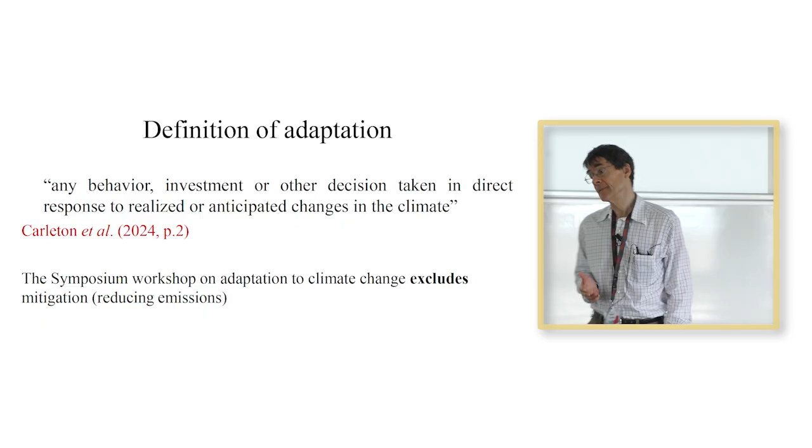Just before the conference, there was a symposium in Zinal, which went on for two and a half days. And my presentation is essentially a shortened version of what I presented in Zinal. And I'll begin by defining adaptation, because during our discussions, we found sort of conflicting definitions, and I want to focus quite sharply on one dimension here.

So here's one of several definitions that comes from a recent and a very good paper. Any behavior, investment, or other decision taken in direct response to realized or anticipated changes in the climate. All right, so it's forward-looking in the sense you look out perhaps to the end of this century, estimate what's going to happen in terms of temperature, precipitation, and so on.

But what the symposium workshop did was to rule out mitigation, right? Because some definitions include that. So unlike Moise, I'm not going to say anything about increases in greenhouse gas emissions, although that, of course, is a strong motivation for adapting.

All right, so what I'll do is to summarize the conclusions or what was identified as important ideas during the symposium. And I hope I'm not cannibalizing what was done.

Steph is no longer here to shut me up.

So 3 or 4 of these lessons come through in the presentation, but there's some additional considerations which the symposium participants saw to be important. The first is that unlike climate change, which is a global externality, the actual effects are highly heterogeneous. So even 2 locations separated by a few kilometers can experience quite different precipitation, particularly if you're on the windward side of the mountain versus the leeward side, for example.

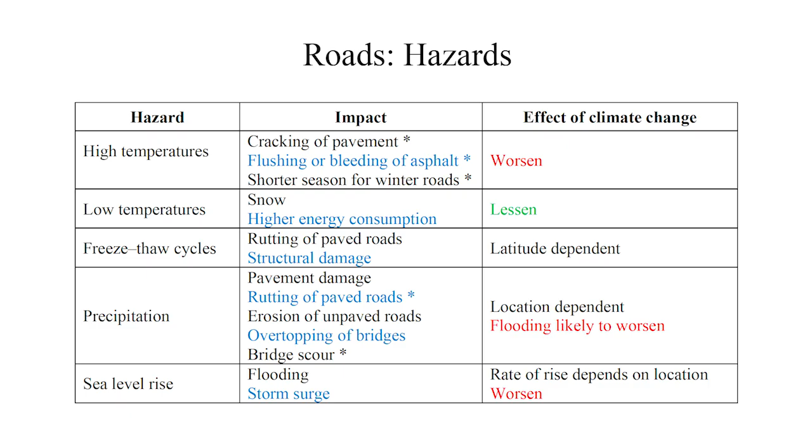They're identified in the left-hand column: high temperatures, also low temperatures in northern climates, freeze-thaw cycle, where the temperature rises above freezing but then below, and that causes expansion and contraction of the road. It can cause it to break apart, right? So it doesn't last as long as intended. Precipitation, and then sea level rise. And what I've done there is to identify the ways in which the problems are materialized, and the black-blue alternation is just so you can read that middle column a little bit easier.

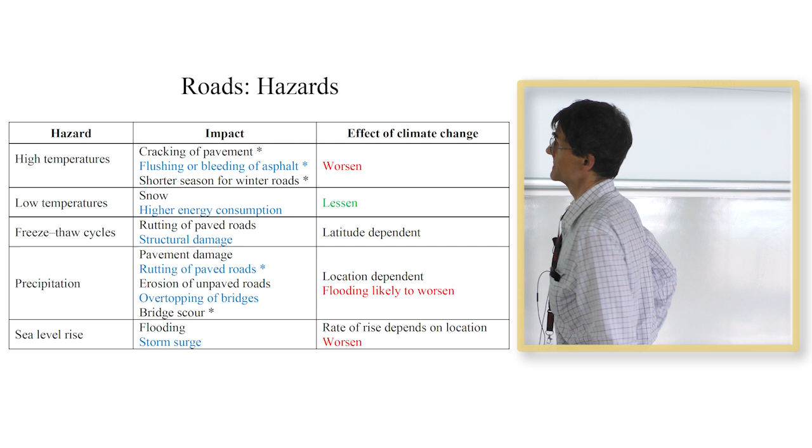And then, with climate change, are these particular problems going to get worse or better? Well, in the case of high temperatures, for the most part, they're going to get worse because it's global warming, although there can be instances where you have cold spells. Low temperatures, probably not so bad. Freeze-thaw cycles, it all depends on latitude. It depends on whether you're going to a climate where it's almost always cold, below freezing, so you're not going to get the freeze-thaw cycle, or whether it's intermediate or whether it's already pretty warm.

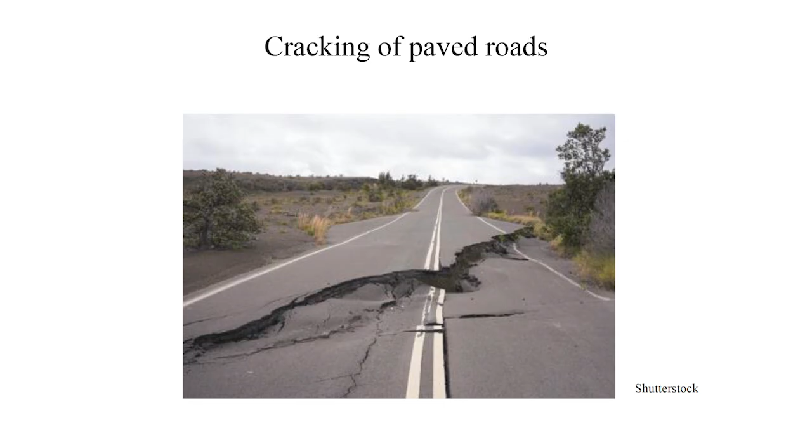Precipitation, it depends very much on where you are, but extreme rainfall is likely to become more frequent, even if the annual amount of precipitation doesn't. So that'll probably get worse. And then sea level rise, that'll get worse, although the amount will vary according to where you are, what coastline and what continent. So here's an example of cracking in a paved road.

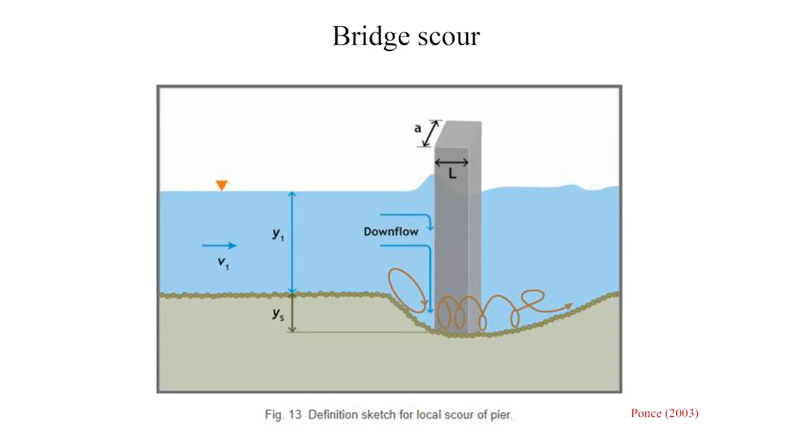Bridge scour. In this diagram, we have the river or the stream going from left to right. And when it reaches a pier of a bridge, you get turbulence, right? So it can speed up, and you get what's called scour. And that means the embankment, whether it's sand or soil or mud or whatever, gets eaten away. And that means that the foundations of the piers, which are supporting the bridge, get undermined.

And that's a problem. Now, rail is particularly complicated because there are many things which can be harmed by extreme weather and climate change. 11 components of the infrastructure in the left-hand column. Then you have the mobile plant, the trains which are driving on the track. The staff, the people who run the trains, the people who repair. And if it's very hot or very cold, the work may be dangerous and it has to be suspended.

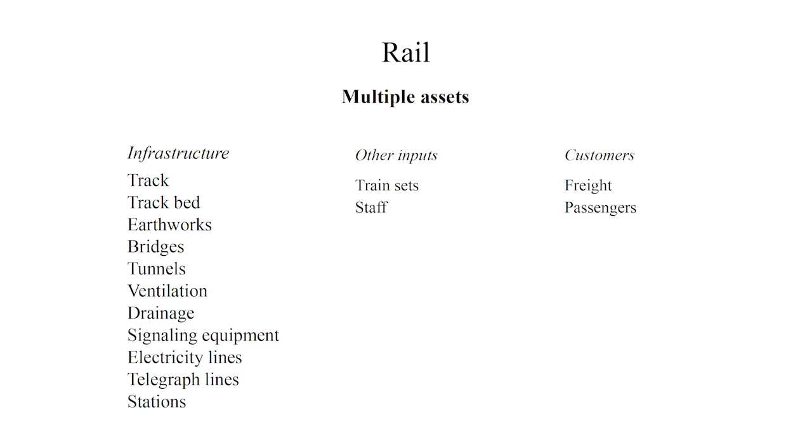And then, of course, what are the trains used for? To transport freight or passengers. The freight, if you don't have air conditioning, can melt, and then, of course, people can suffer a heat stroke and so on. So many things to protect. So here are the hazards. You can see they're fairly similar to those I had listed for the road. Many impacts. And are things likely to get better or worse? Well, for the most part, worse, with the exception of the low temperatures.

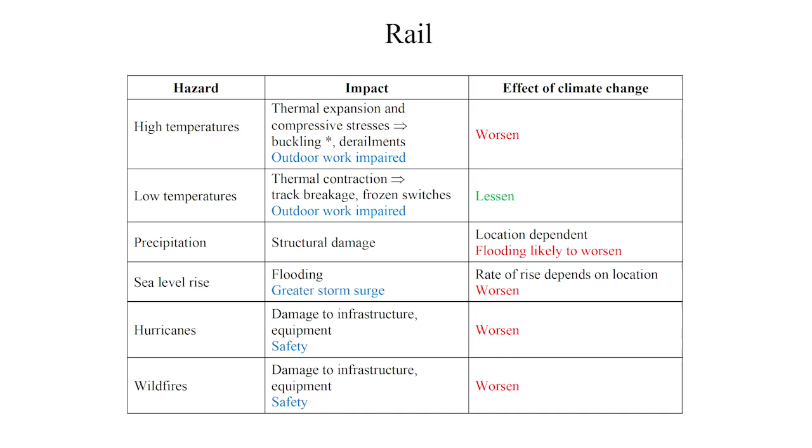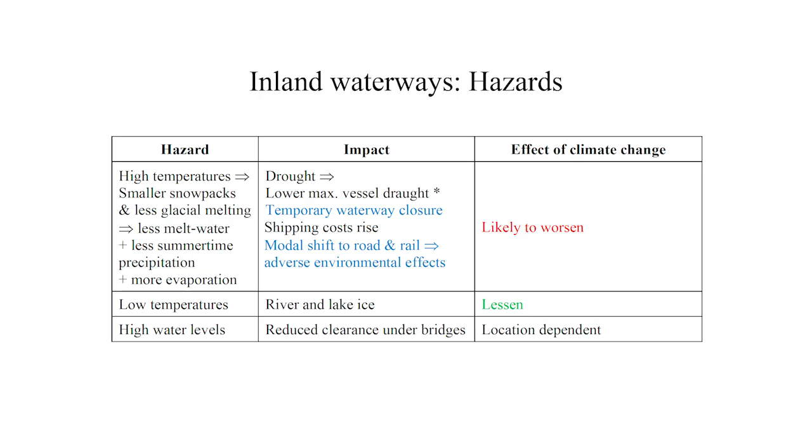The drought means that the water level shrinks, and the barges with a high draft can no longer operate. So either the load has to be reduced, or they get replaced by smaller barges. And that means an increase in cost. It may be possible in some cases to shift mode to the road or the rail, but it's not efficient because the barges can carry hundreds, even thousands of tons, and it takes a lot of trucks or trains to do that. And then they're less fuel efficient, so bad for the environment. All right, so things could get better, but more likely to get worse.

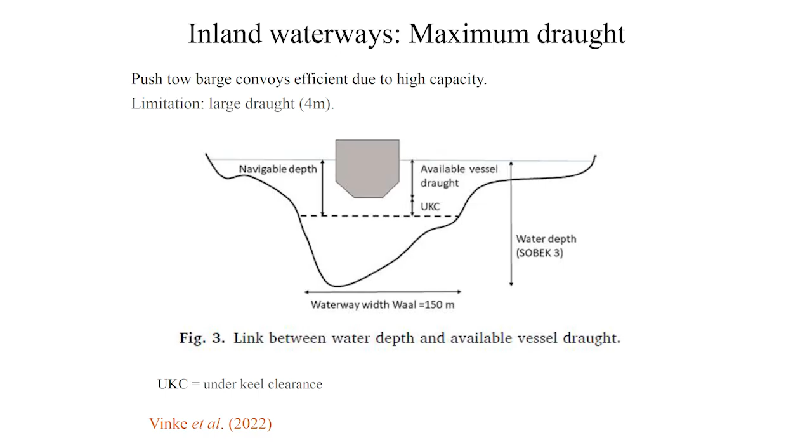And here's an indication of how you determine the maximum draft of a vessel. In the interest of time, I'll skip it. That's a schematic for the Rhine. So let's go into adaptation. Now, as I mentioned, there are really 3 time intervals during which adaptation can be classified.

Ex ante means you build things new so that they are robust, resilient, so they can withstand more adverse weather and climates in the decades to come. Ex post means when buckling is a threat, you reduce the frequency of trains, reduce the load, reduce the speed, so the lateral forces on the rails are reduced.

There was some pushback from other participants in the symposium as to whether this is a useful third category, but I think so, because adaptation isn't always right now or wait until a disaster occurs. You might wait until some threshold is reached—sea level rise has gone up by 50 centimeters, it's too dangerous to let it go further, or the frequency of heat spells and extreme weather becomes frequent enough that you really should do something. You may act now, and then 10 or 15 years later, the threat has risen again, so you take further action. In some cases it's not obvious whether to categorize something as periodic, ex ante, or ex post, but I think it should be considered.

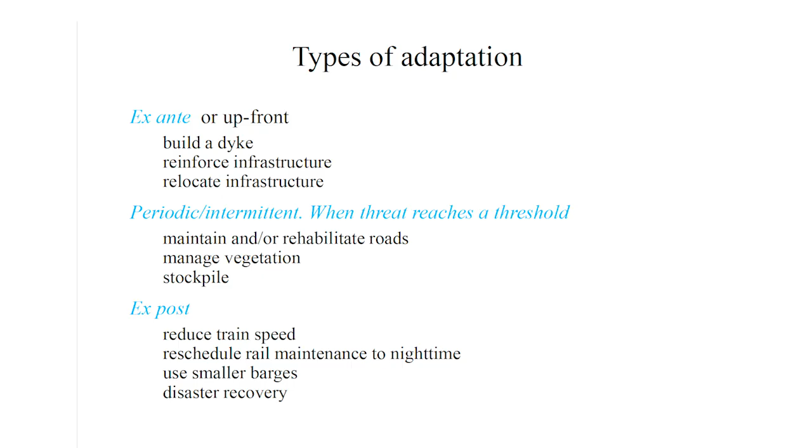If you can't deliver freight to the destination for some time, having a bigger inventory means it takes longer before it runs out. So it provides some security to the supply chain—that's for freight, not for passengers.

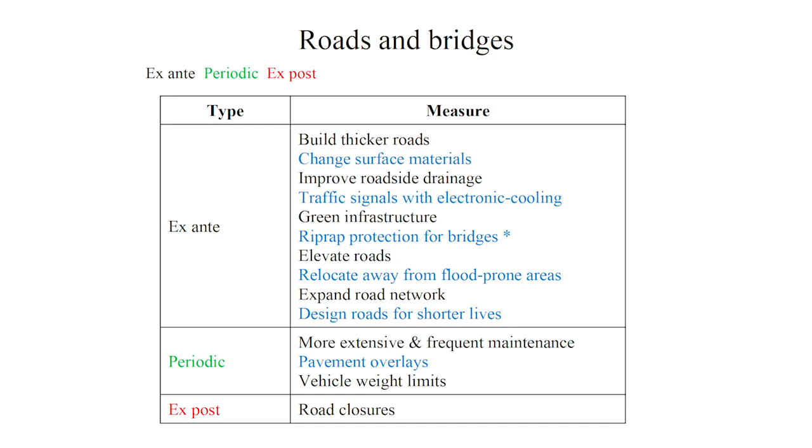So what about the ex ante, periodic, and ex post measures? There are a lot of them. I'm not going to go over all of them, but it indicates there are many ways in which you can protect, so it becomes a difficult decision as to which measures you're going to deploy and when.

Here's an example of what's called riprap protection—I had to look it up in Wikipedia when preparing these slides a few weeks ago. It's simply boulders, which may weigh several hundred kilograms each, not connected to each other, just piled up, and it slows the water so it no longer causes scour. If you look at rivers, quite often you see this riprap.

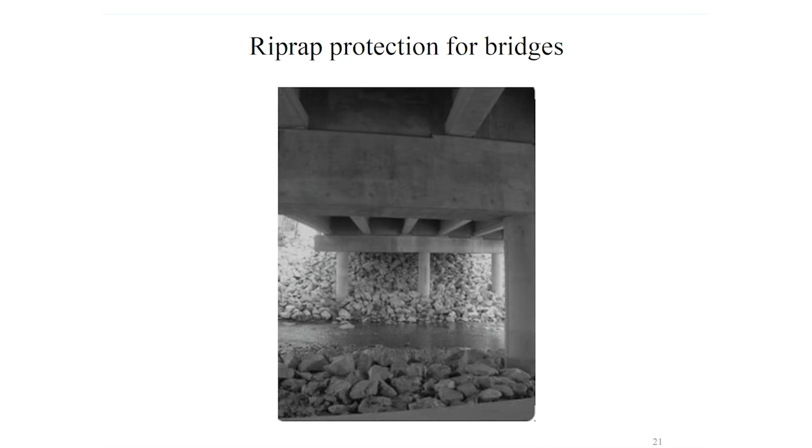There are several case studies showing the ways adaptation can occur and how useful it is. Here's one on roads—actually the whole infrastructure in Alaska—projecting out to the end of the century, what the damage is likely to be, and how we go about protecting the infrastructure to reduce loss. In this case, it was found that roads are the form of infrastructure that's mainly vulnerable—not rail, not airports—and it's mainly precipitation.

What they determined is that you've got to protect the roads, and if you do it by improving the drainage, you can almost eliminate the cost. So it's a sort of good story—you only have to worry about one mode of transport, and you only have to protect it in one way. That's the good news about adaptation.

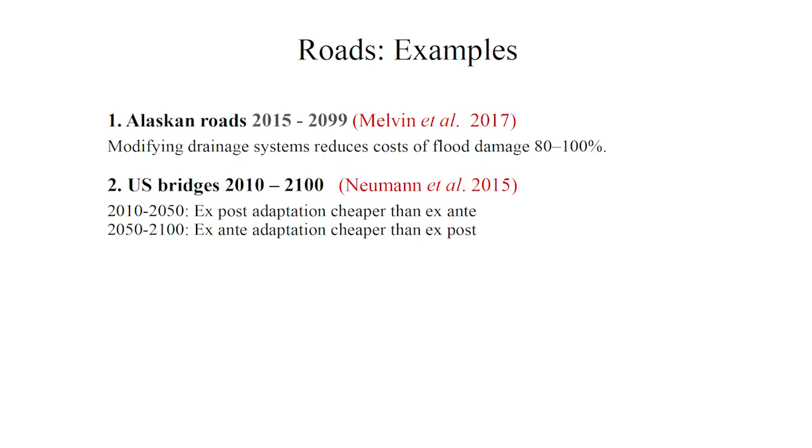Another example, also from the US but countrywide, looked at bridges, again to the end of this century. The question asked was, should you be protecting ex ante or ex post? The answer switched at mid-century: up until 2050, ex post was cheaper—you wait until there's a problem and then fix it—but after that, ex ante was cheaper, so you don't wait further; you either replace the bridge or bolster it. That wasn't intuitive to me, and I couldn't see an explanation in the article, but they're clearly addressing an important problem.

The third is a paper, not yet published I think, but done very well, looking at firms in Pakistan subject to flooding and how they might respond. There are several ways: first, relocate their own facilities to safer ground. Second, concern about the reliability of their suppliers—if suppliers get inundated, the inputs this firm requires will be disrupted, so they switch away from those vulnerable suppliers. Third, not only switching but adding more suppliers, spreading the risk.

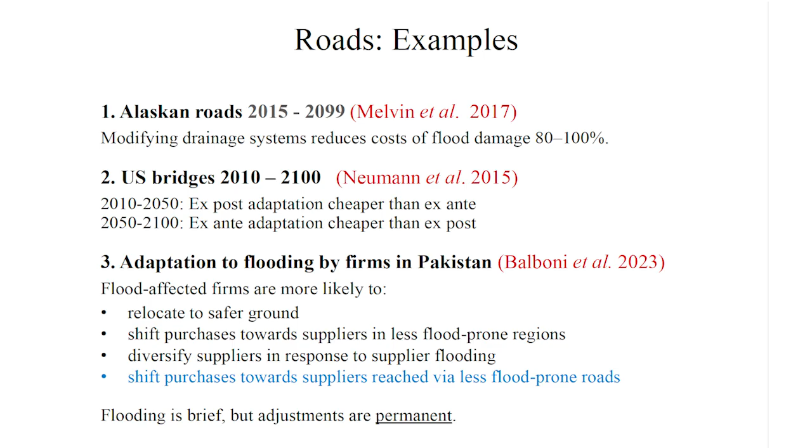The fourth, most relevant to this presentation, is that roads connecting the firm and its suppliers may be vulnerable—even if both sites are safe, if the roads in between get inundated and impassable for days, that's bad news. So firms shift purchases away from suppliers connected by vulnerable roads. There were about 6 billion observations in this study, so the results are statistically significant. Interestingly, floods might be over within a few weeks, but the adjustments are permanent—they don't go back to the previous supplier. So there's hysteresis, or learning, meaning we have to do things differently from now on.

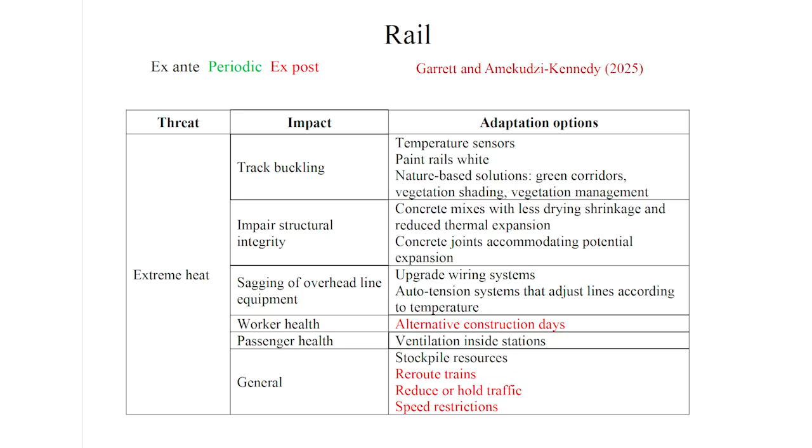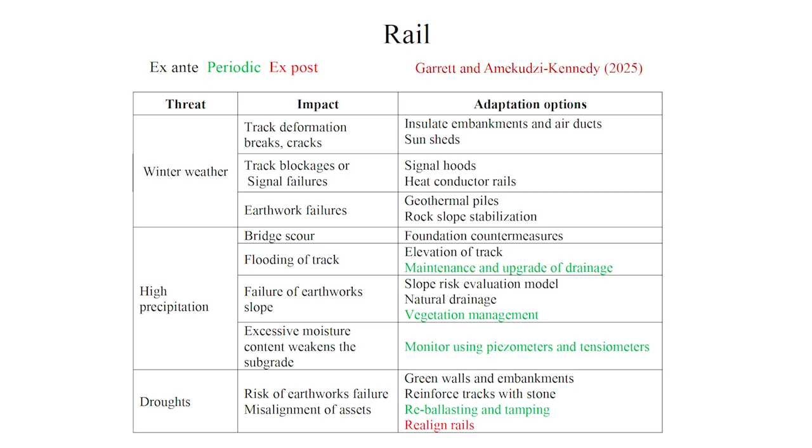Now, as far as rail is concerned, I classify ex ante, periodic, and ex post. I won't go over the details, but you can see it's mostly ex ante. Just a few examples of ex post there, in response to extreme heat, winter weather, high precipitation, droughts. Now there's more periodic ways of adapting, and in response to extreme winds and wildfire, there's a bit of a mix. So you can see there are many ways in which adaptation can be implemented. It depends on the threat, and the timing is a big and clearly important question.

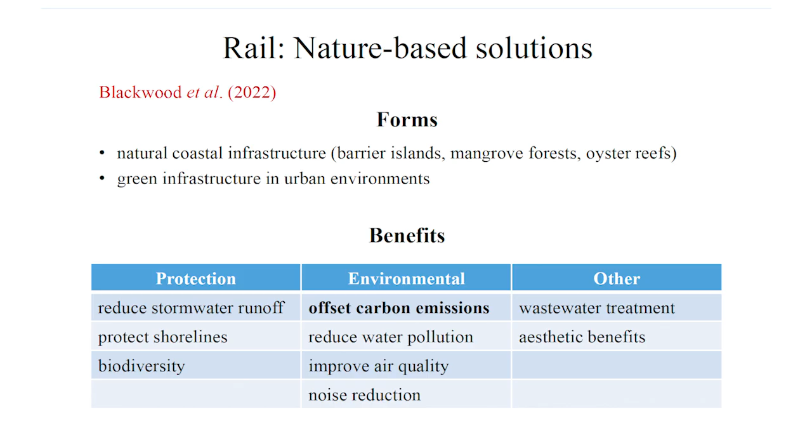Now, what about nature-based solutions, which would involve planting trees or some kind of vegetation along the rail bed or along the roadway to provide some protection? Well, that can be done in two ways. One is let nature take its course, mangrove forest for example, and then green infrastructure in urban environments - so roads and possibly rail lines - and it has co-benefits.

As far as protection, you're protecting against stormwater runoff, protecting the shorelines, maintaining the diversity of biological species, but you're also reducing emissions, as well as water pollution, air quality, and noise, because the trees will block the noise. And there are some aesthetic benefits as well. So this is an instance where there are coordination or supplementary benefits which should be taken into account if you're doing a cost-benefit analysis as to whether this form of adaptation is going to be useful.

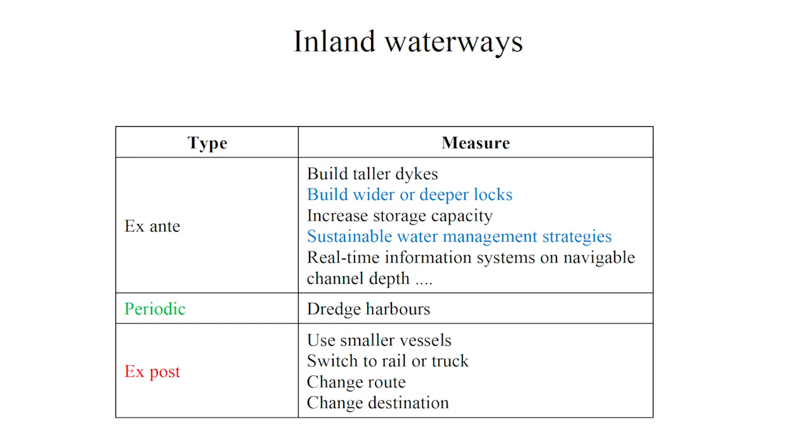Inland waterways - you can see there's a smaller set of measures of adaptation, but again, ex ante, periodic, and ex post. And then I'll conclude with this nice case study.

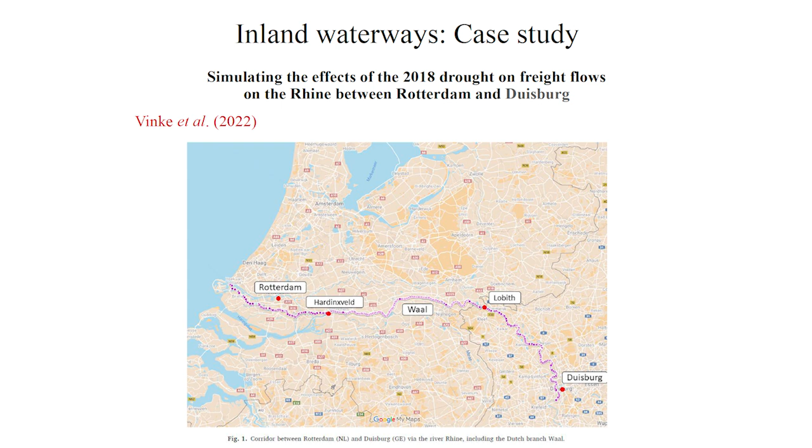A fairly recent study looked at the effects of a very severe drought which occurred on the Rhine for much of 2018. The section of Rhine - Rotterdam is the mouth, and the question is, can you get goods to and from Duisburg in Germany? What the study did was a simulation looking at the amount of flow into the Rhine at this town of Lobith.

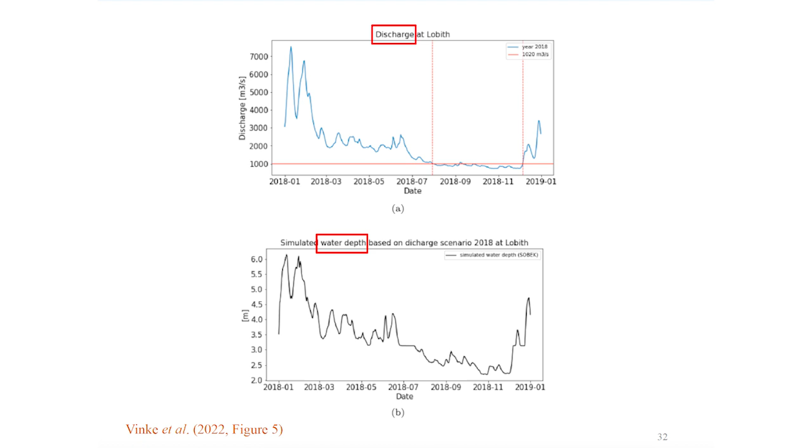What the authors did was simulate the water depth. They didn't actually have measurements, but they had reliable software to do it. You can see it was almost a mirror image of the discharge rate, with different units of measurement. Now, the biggest barges require 4 meters of draft, and you can see by the middle of the year it was no longer there. So you had to switch to smaller barges, which are less efficient - they sacrifice economies of scale.

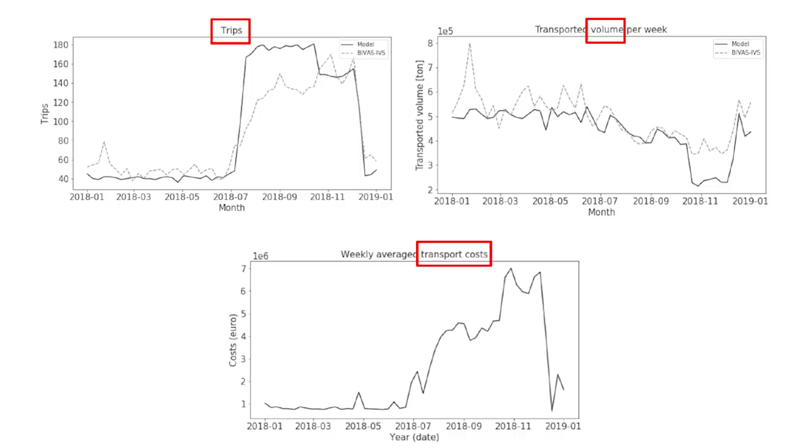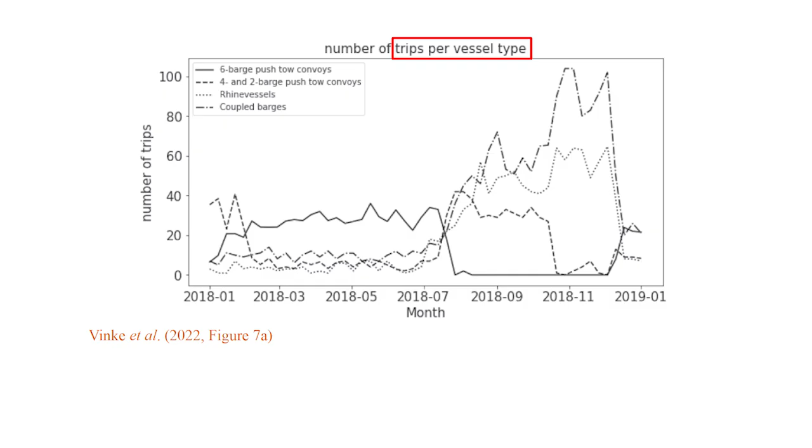Here we see the type of barges being used. The best ones in terms of scale economies are the 6-barge push tows, shown by the solid line, and they were operating until mid-year, then they stopped, because even if empty they couldn't have navigated the Rhine. There was a switch to the 4 and 2 barge push tows, an intermediate size, shown by the dashed line, but that dropped to zero towards the end of the year because even those barges couldn't make it. Then these other smaller types - Rhine vessels, coupled barges - took over. But the volume did drop considerably.

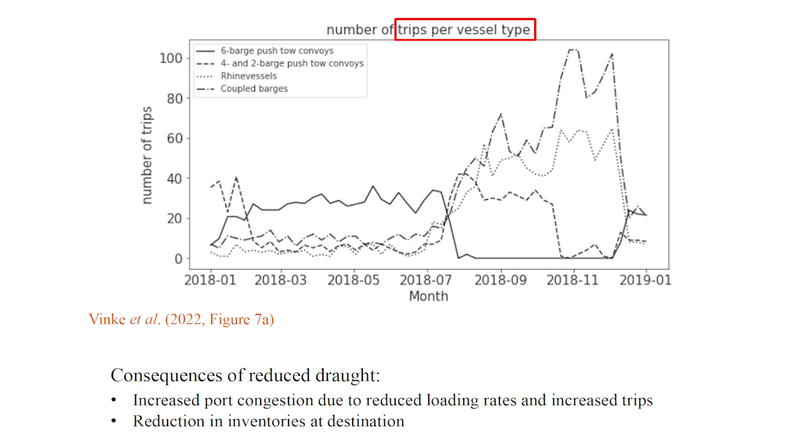And then the network effect that Mo was hinting at was relevant here. You have many more smaller barges going to Rotterdam, and that was causing congestion, because congestion is not just a function of vessel size, but how quickly it can be loaded or unloaded, and having berths - so vessels can stay stationary until they can be serviced. Also a reduction in inventory - so some shortages occurred.